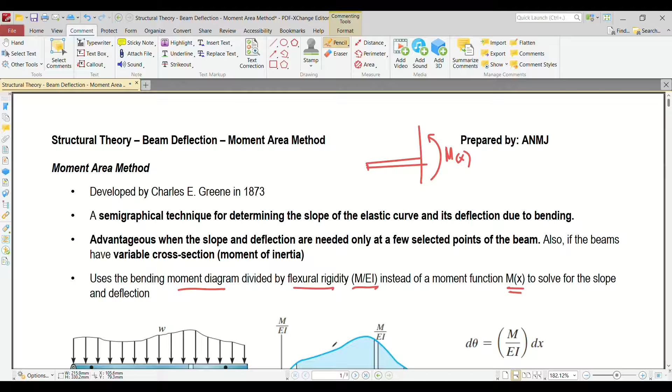So why do we need that? It's all about our derivation of the formula. Later we'll derive it. Okay, let's derive our formula here.

If you'll remember, based on the moment curvature relationship, the value of dx is equivalent to rho d theta. Right? What if I change my mind? Instead of using dx, I want to solve for the value of d theta. What will happen to our equation?

So what happens is d theta becomes equivalent to 1 over rho multiplied by dx. And if you remember, the value of 1 over rho is the same as m over EI, which we derived last time. So therefore, we could say that d theta is equivalent to m over EI times dx.

So now, what if I want to solve for the slope? I need to get rid of the derivative. Isn't the opposite of a derivative integration? So let's integrate both sides.

So what will happen? Let's integrate, and put a limit from a to b on both sides. So what will happen to our equation? Theta with reference to b to a becomes equivalent to the integral of m over EI times dx from a to b.

Okay, so now what is m over EI? Actually, class, m over EI is just the moment diagram divided by the flexural rigidity, just like we said earlier.

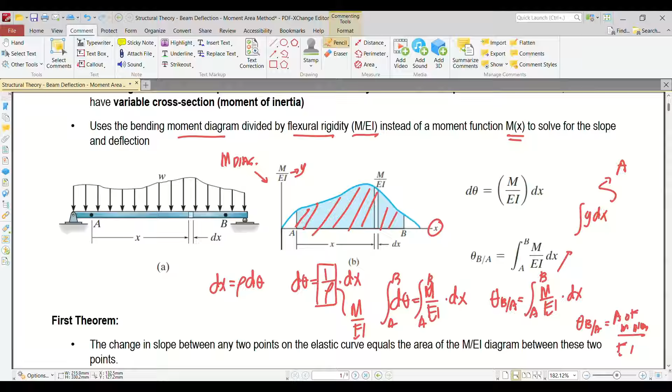So ano nga ba yung theta BA na pinag-uusapan natin? Bakit natin kailangan kuhanin yan? So ito po yan. Basahin na natin yung first theorem. Sabi dito, the change in slope between any 2 points on the elastic curve is equal to the area of the M over EI diagram between these 2 points.

So anong ibig sabihin yan? Let's say for example, this is our elastic curve. Naglagay tayo ng tangent line from point B at naglagay din tayo ng tangent line from point A. So ang subtended angle between two tangent, tawagin natin yung theta BA or theta AB. Either way, okay lang naman magkaiba ng pangalan. Basta may point A, tsaka may point B, or point C, point D, basta dalawa na magkaibang letter. Okay lang yan, nabubuo yan kapag nag-cross ang landas ng dalawang tangent line.

So sabi natin, if you want to get this value, kukuhanin mo lang class yung area nito. Ayan, nakalagay sa formula, theta BA is equivalent to the area of the M over EI diagram from A to B. Now in other books, nakalagay din po na theta BA is equivalent to theta B minus theta A. But ang nakalagay sa akin, o nilagay sa ating module, is this is not always the case.

Why? Take a look at this. Let's say for example maglagay tayong tangent line dito class, una muna siguro dito, sa ating mga points. Kapag naglagay tayo ng horizontal line dyan, ibig sabihin class, itong angle na to is represented by theta A. Kasi meron kang tangent line sa point A, naglagay ka ng horizontal line, subtended angle between the horizontal line and the tangent line, that is your slope. So this is your theta A.

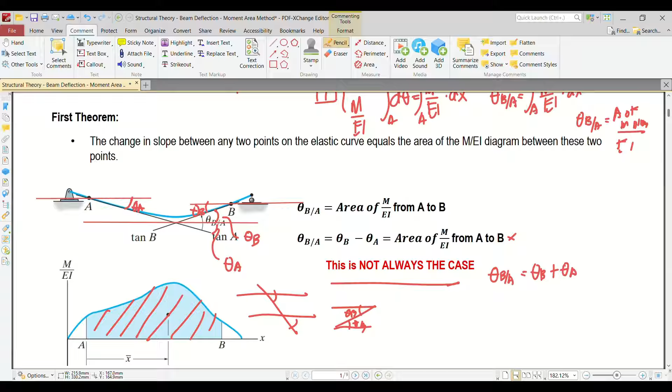So ibig sabihin, hindi ito nag-govern. Hindi pala yan tama. So hindi ibig sabihin class na hindi yan tama, magkaiba lang sila ng senaryo. So take a look at this.

Let's say for example, we have a beam. Drawing natin yung beam, siguro maliit na lang, no? Lagyan natin support, say pin na lang, tapos roller. Okay, subjected to any kind of loading class. So of course the beam will deflect, right?

So lagay natin yung deflection ng beam is kulay blue. So let's say this is point B, tapos somewhere here is point A. So lagay tayong dalawang tangent line. Lagyan natin tangent line sa point B, ito yun. Tapos lagyan din natin tangent line sa point A, ito yun.

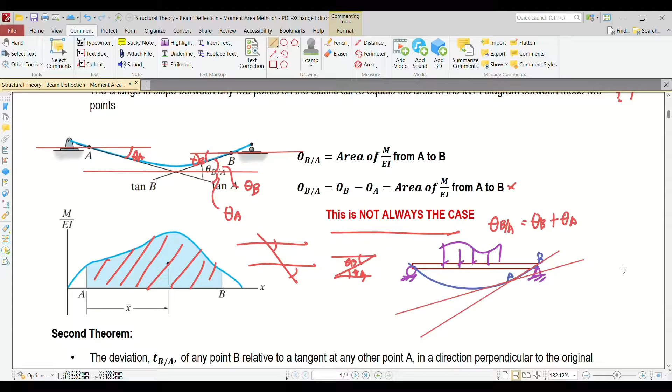Okay, so ngayon mag-drawing na tayo ng different angles. Para makapag-drawing tayo ng theta B, gawa ako ng horizontal line dito, class. Ayan yung horizontal line natin. Ito class, yung from here to here, this is our theta B. Okay, so ngayon punta naman din tayo dito, gawa tayo ng horizontal line sa point A. Para malinaw ha, ito yung tangent line sa B, ito yung tangent line sa A.

So ito class, from here to here, this is your theta A. Sabi din natin, subtended angle between two tangent, ito yung dalawang tangent na pinag-uusapan. Ito rin ay equals to theta BA, subtended angle between tangent eh. Ito yung tangent A, ito yung tangent B. So ibig sabihin ito ay theta BA.

Okay, so ngayon, naniniwala din ba kayo na itong buong to is also equivalent to theta B? So as you can see, parang ganito rin yan, no? Kunyari, meron kang horizontal line dito, dalawang horizontal line.

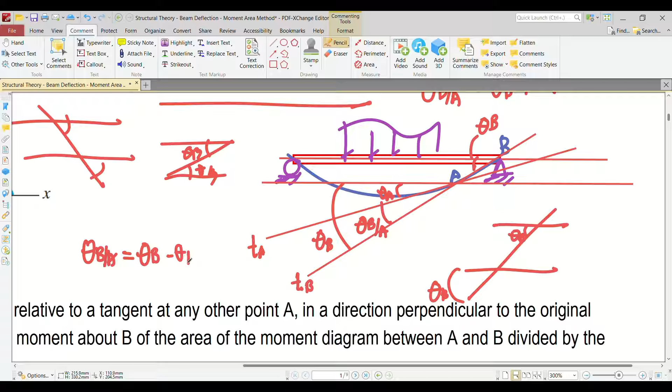Kunyari, ito yung theta B mo. Ayan yun, no? Theta B. So, tama ba na ito rin ay also theta B? Horizontal line, ito yung tangent line sa B. So, therefore, theta B rin to. Okay? So, we could say that theta BA, based on this figure alone, is equivalent to theta B minus theta A. So, ibig sabihin, this statement is true. So, tama rin yan, no?

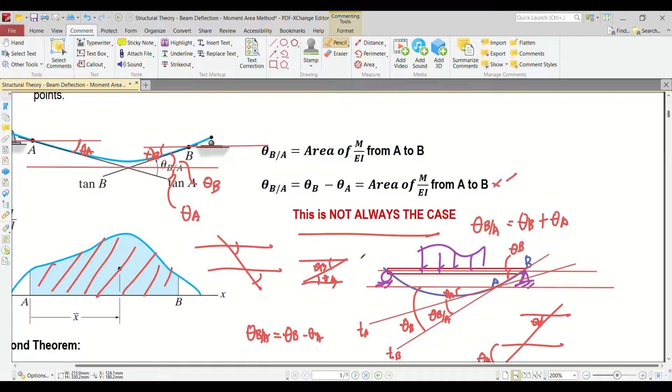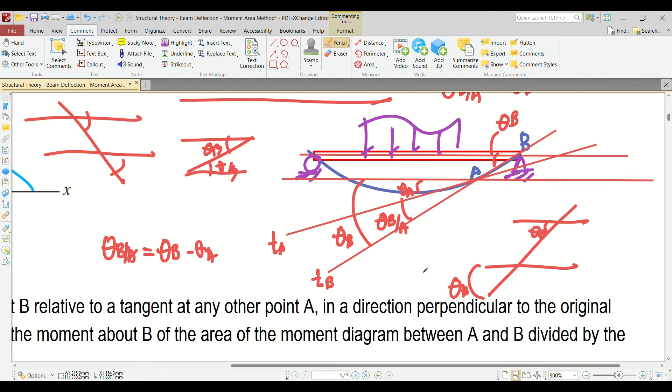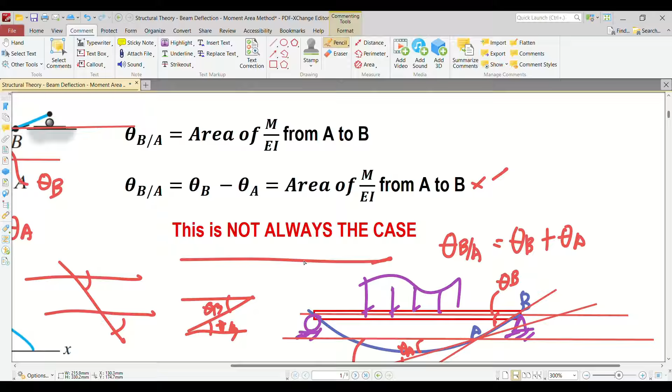So, anong pinarating natin dito? Kailan nagiging tama ang theta B minus theta A? And then, kailan din naman nagiging tama ang theta B plus theta A? So, ganito yan, class. Kapag magkaparehas ng direction ang dalawang tangent line, just like this one, diba? Parehas silang papunta sa left side or parang paangat sa right side. Pababa sa left side, paangat sa right side. Kapag parehas sila ng direction, ang dalawang angle natin ay magsusubtract, or theta B minus theta A. Kapag naman opposite ang direction ng ating dalawang tangent line, just like this one, yung isa na paangat sa left side para pababa sa right side. Yung isa naman, paangat sa right side, pababa sa left side. Magka-opposite yung slope natin, no, ng dalawang tangent line. If that's the case, ang mangyayari sa'yo, mag-a-add yung dalawang angle mo. Take note of that concept kasi that concept is needed in order to solve the value of either theta A or theta B. Naintindihan po?

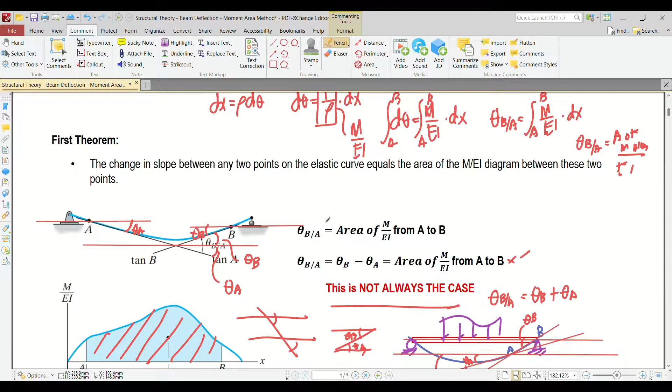So that is our first theorem for moment area method. So ngayon, let's discuss the second theorem of moment area method.

So ito yung statement, basahin ko lang. The deviation TBA of any point B relative to a tangent at any other point A, in a direction perpendicular to the original position of the beam, is equal to the moment about B of the area of the moment diagram between A and B, divided by the flexural rigidity EI. So what does that mean?

So ganito lang po, no? Medyo mahirap intindihin yung second theorem pero ito lang yung pinaparating niya. Kapag gumawa ka daw ng tangent line sa B, tapos sinukat mo yung distance from the elastic curve, no, to the tangent line drawn from another point, in our case that's tan B. Ang tawag dito daw class is tangential deviation of A from the tangent line drawn from B. Okay? So, ganun din naman sa kabila, no? Ito yung tangent line mo sa A, ito yung point B sa ating elastic curve. So, ang tawag dito class, tangential deviation of point B from the tangent line drawn from point A. So, take note na yung pagbasa ng ating tangential deviation is very important. Why? Kasi class, ang sabi dito, to get that value, to get this distance, ang gagawin mo lang is kukuhanin mo yung area ng M over EI diagram from A to B and then you will multiply it by the centroid. Ngayon, saan manggagaling yung centroid ng iyong, or saan yung reference ng centroid ng iyong moment diagram? Take note that kung sino yung unang binanggit, doon manggagaling yung reference mo for the centroid, no?

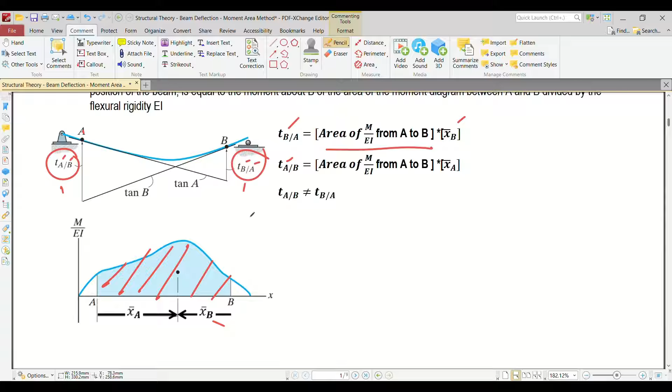So, bakit nga ba natin kailangan kuhanin yung tangential deviation? So, we would need the tangential deviation in order to solve for the value of the deflection, especially, no? Kasi, and the slope, no? Kasi, yan yung magiging basis natin in calculating it using trigonometry. Gagamit po tayo ng trigo dito, no? Okay? So, yan po yung second theorem natin.

Now, let's discuss the sign convention for moment area method. There's no such thing as sign convention for moment area method, class. Kasi kadalasan, ang ginagamit natin is distances, no? Distances na ninegate natin yung mga sign convention.

Kapag ninegate natin yung sign convention, mawawala na tayo sa sign convention. In my class, kung ano yung sign convention sa double integ, yun na lang yung pinapa-adapt ko sa students, para uniform kami pag nagpa-assessment sa kanila. So ganun po yung ginagawa ko.

Pag ganun yung scenario, pag ginamit mo yung sign convention ng double integ, ibig sabihin counterclockwise, positive, clockwise, negative, downward deflection, negative, upward deflection, positive. Akin lang naman yan. If you want to adapt, it's okay, basta you understand.

Kasi naman, we have no choice, we need to draw the elastic curve, para makikita mo talaga kung anong direction ng slope tsaka deflection. Ang ginagawa lang natin dito, kaya tayo nagkakaroon ng sign convention, para pagka nagkaroon tayo ng assessment, uniform yung ating mga sagot.

So although wala siyang sign convention, I have additional notes here. Take note that if the tangential deviation is positive, it means that the location of the elastic curve is at the top of the tangent line drawn from a point. Anong ibig sabihin nun?

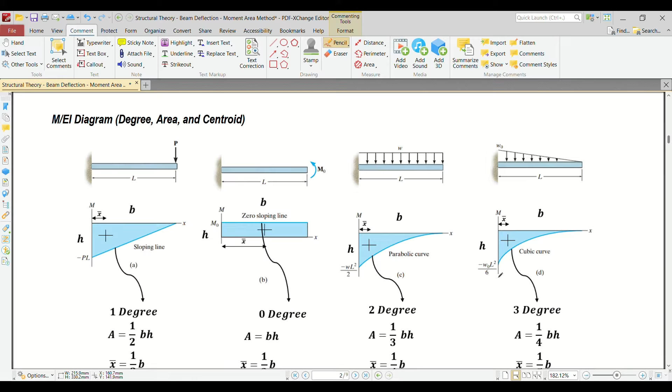Sa moment, second degree. Kapag naman meron kang varying load sa moment, sa shear, since this is already first degree, sa shear, second degree na siya. And then pagdating sa moment, that's third degree o cubic.

Ngayon, since we need areas and centroids, so let's review. Kapag triangular yung nabuo na moment diagram, madali lang naman, 1/2 base times height, and then the centroid will be 1/3 with reference to this axis. Ngayon, kung kabila naman, that's 2/3. And then, pag dito naman, rectangle, base times height, ang centroid is 1/2 ng base. Pag dito naman, 1/3 base times height.

Bakit naging 1/3? Kasi if you'll remember, we have a generic formula for spandrels. Ang generic formula natin is area is equivalent to 1 over n plus 1 times b, times h. Ngayon, ano ba yung n dito?

N is the degree of your curve. So if your degree is second, therefore yung area mo is 1/3 base times height, tulad ng nakasulat dito. Yung centroid naman, may generic din formula, so that is 1 over n plus 2 times b. So in our case, since we have second degree, yung centroid mo is 1/4 ng b.

Considering this is the reference point. Kapag kabila naman, of course, that's 3 over 4. Ngayon, kapag third degree, gagamitin mo lang din yung formula na to, so that's 1/4 base times height. Kapag naman centroid, that's base ng 1/5 ng base kasi third degree na nga tayo. And then for kabila naman yung gagamitin mo, that's 4/5 times b.

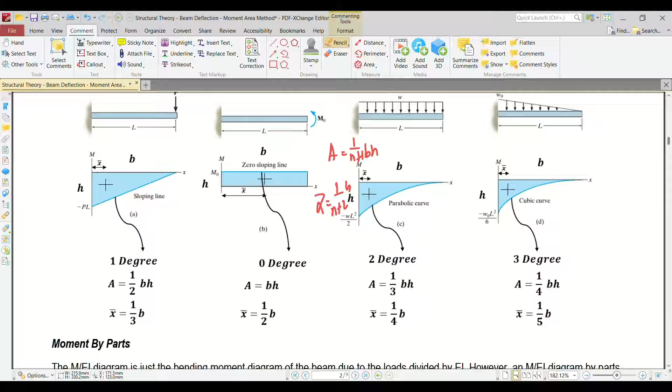Ngayon, medyo mahirapan ka kasi kung dadaan ka sa shear diagram tapos pupunta ka pa sa moment diagram. So meron akong sinasuggest na pwedeng gamitin, that's what we call moment diagram by parts. Yung moment diagram by parts kasi pwedeng gamitin para maka-shortcut ka, para hindi ka na dumaan sa shear diagram. So pwede rin gamitin po ito.

Parehas lang masosolve natin kapag nag-gawa tayo ng shear and moment diagram. Okay? So paano nga ba yung moment diagram by parts?

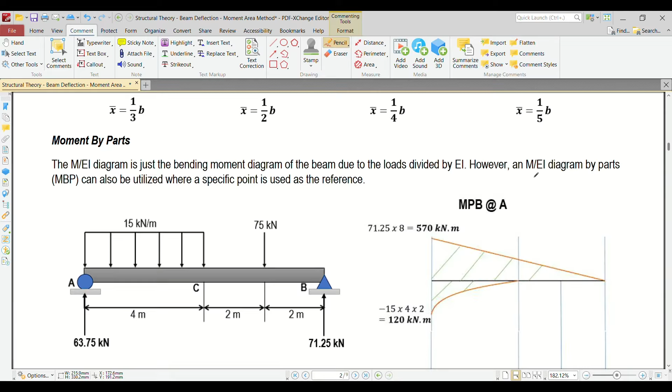Take note class, sa moment diagram by parts, ang unang gagawin mo is you need to select a reference point. Take note, in selecting a reference point, you have to be strategic. What do I mean by strategic? Dapat yung isa-select mong point of reference, may makakancel kang forces. Bakit mo siya makakancel? Kasi gagawin mo siyang fixed. Lahat ng forces iikot dun sa reference point mo.

Let's say for example, we have this kind of beam, at nakalagay na dyan yung mga reaction, class. So what if I take reference point at point A? Ibig sabihin, yung point A natin, gagawin nating fix. Ano yung mga na-cancel kong forces pag nag-reference point ako sa point A? Of course, yung reaction sa A, hindi na yan iikot sa point A kasi wala siyang perpendicular distance. And then ito, ikot yan. Yung reaction mo sa B, ikot din yan. And then the uniform load, iikot din yan. So lagi nyo lang tatandaan, gagawin mong fix yung reference point mo.

All of the upward forces will also be upward with reference to your reference point, and that should be positive—lahat ng pataas should be positive. Kapag naman pababa yung forces, pababa din sa reference point mo, and negative din sila sa iyong moment diagram by parts. So as you can see here, ito yung moment diagram by parts with reference to point A.

So ano yung maiikot? Since this is concentrated loading, first degree siya sa aking moment diagram. So that's 71.25 pataas times 8, so that's 570 kilonewton meter. Pataas siya, so pataas din siya sa reference point ko, so that is positive.

Ngayon, yung 15 naman, so as you can see, yung 15 kilonewton per meter is uniformly distributed loading. Ibig sabihin, itong curve na to, class, is second degree. Kung second degree siya, napababa, pababa din siya sa aking reference point. How do you get the value of the moment of this uniform load? Magmo-moment ka lang from point A, that's negative 15 times 4 times 2, ang sagot mo, negative 120 kilonewton meter. Bakit negative? Kasi the forces is downward with reference to point A.

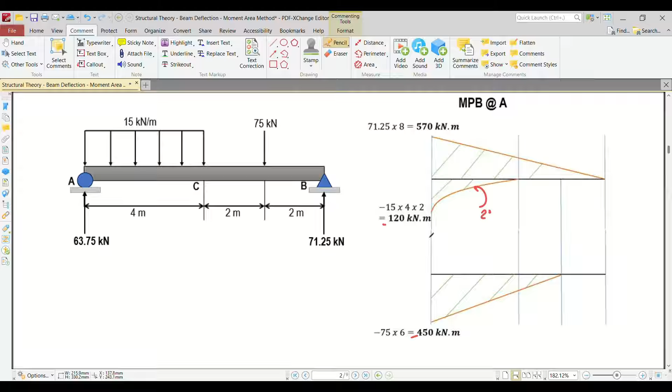So let's say we want to take reference at point B. Ibig sabihin, makakancel ko yung reaction ko sa B. So dito ka na mag-fix. Kapag dyan ka nag-fix, class, all of the forces will move or rotate at that point.

So ngayon, ano yung magro-rotate? Number 1 is the 63.75 courtesy of the reaction sa point A, multiplied by the perpendicular distance which is equivalent to 8. Ngayon, ang value niyan, 510 kilonewton meter. Aside from that, we also have the concentrated loading, downward din sa aking reference point, that's 75 times 2, first degree kasi concentrated loading.

Okay, and then you also have 15 kilonewton per meter, uniformly distributed load siya. So therefore, second degree from point A to point C lang, class. Bakit ganyan? Kasi kung matatandaan ninyo, kapag naputol yung loading mo pag nag-drawing ka ng shear diagram, ini-straight mo lang. So kapag ini-straight mo lang, pagdating sa moment diagram, naka first degree yan kasi 0 degree yung shear. Ganon din dito—since yung uniform load natin is from point A to point C lang, ibig sabihin yung second degree lang ay from point A also to point C lang.

So ngayon, paano makuha yung height na to? Mag-moment ka dito sa point na to, so that's 15 times 4 times 2, negative, kasi pababa ka sa reference point. So ito yun, negative 120 kilonewton meter. Now, hindi ka pa naman nakarating sa reference point mo kasi dito ka lang, yan lang yung second degree. Kailangan mo paratingin yan dito.

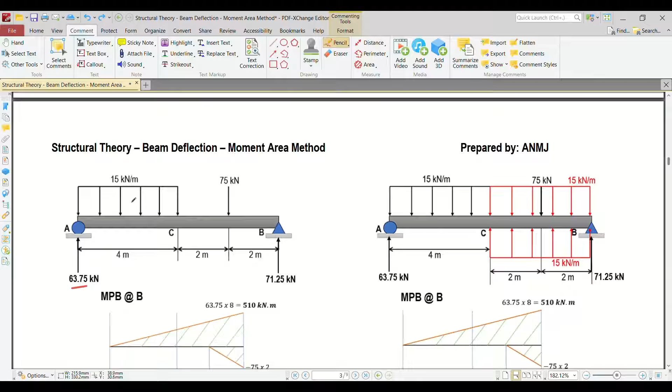Now, how do you get this height? You just moment this 15 again with reference to point B. So that's negative 15 times 4 times 4 plus 2. How did it become 4 plus 2? This 4 is your class, and then plus 2 with reference to the centroid of the uniformly distributed loading. Understood? That's how we do moment diagram by parts at letter B.

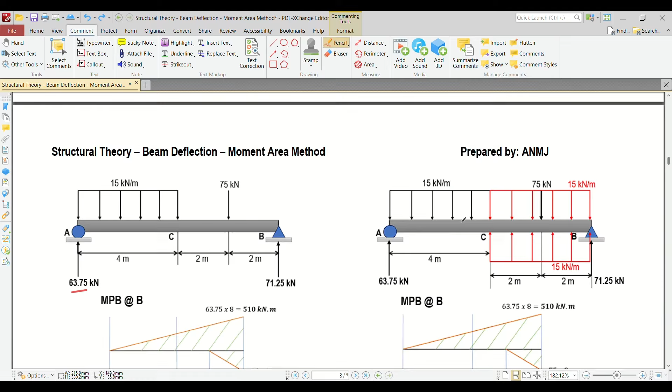So that second degree upward is 15 times 4 times 2, which is our centroid. So that's 120 kilonewton meter. Okay? So since this is now complete, the function won't be cut anymore.

So that's 15, negative, because it's going down relative to our reference point. So negative 15 times 8 times 4. So that is negative 480 kilonewton meter. Okay? So that's with reference point at point B.

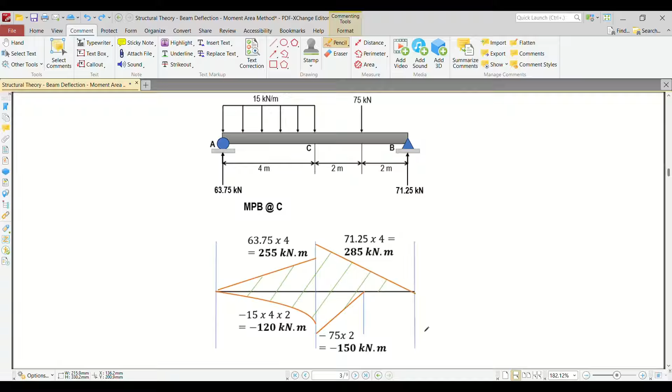Number 1 is the 63.75, upward here too. And then 71.25, also upward relative to your reference point. Then this one goes down, second degree, negative 120. This one goes down, 75, to negative 150. So this will be your moment diagram by parts if you took the reference point at point C. Everything rotates. Okay?

So again, it's up to you in selecting your reference points or in using moment diagram by parts. Whatever makes it easier for you, that's what you should follow. This is just an alternative if you don't want to go through shear and want to jump straight to moment. This is very useful, especially if you're solving for moment area method.

Okay, so now let's try to solve problem number 1 with reference to moment area method. As you can see, our figure and our problem is also problem number 1 for our other topic in beam deflection. Let's try to answer it using moment area method, okay?

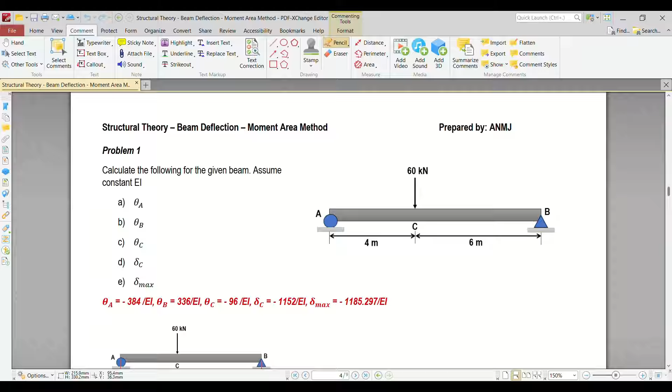So for problem number 1, calculate the following for the given beam, assume EI is constant. Letter A, theta A; letter B, theta B; letter C, theta C; letter D, deflection at C; and letter E, the maximum deflection, okay? So how do we solve this problem?

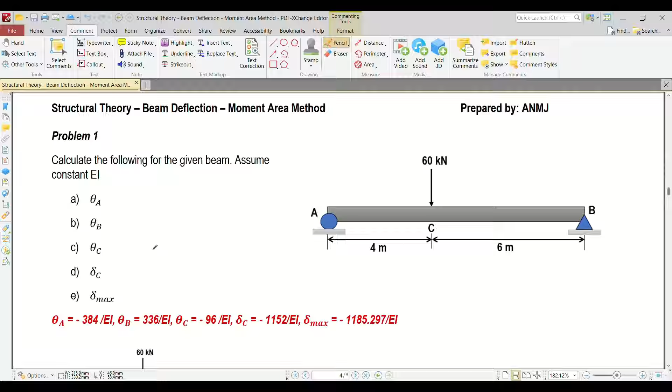First thing you need to do, class, is draw the moment diagram by parts. Remember, when you use moment area method, you need a moment diagram. So start immediately on the moment diagram by parts. If you remember, the reaction here is easy, we already computed that. That is equivalent to 36 kilonewton, and for this one, this is equivalent to 24 kilonewton.

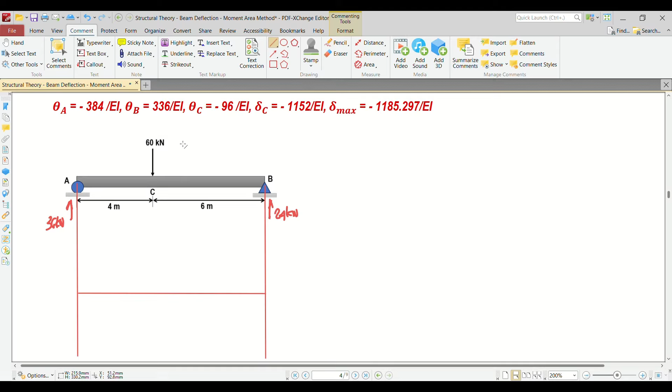Now, the popular choice here is to take the reference point at point A. You can also do point B, or point C, it's up to you. But for me, my reference point is point A. So the 24 and the 60 will rotate from the reference point.

So now, let's start with the reaction first. This is first degree since it's a concentrated loading. So this is 24 times the distance, that is 10, then divide by EI. This is positive because it's positive relative to the reference point, pointing upward. So this is 240 over EI, okay?

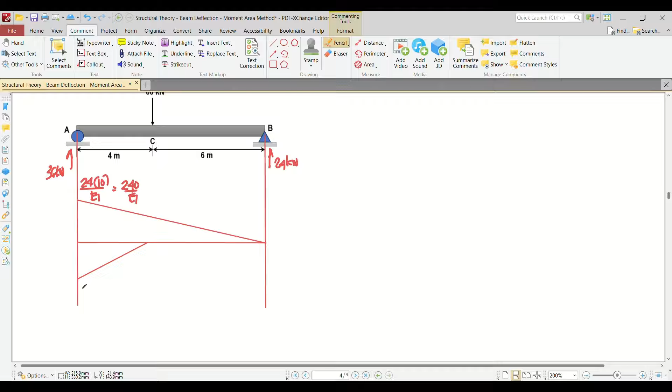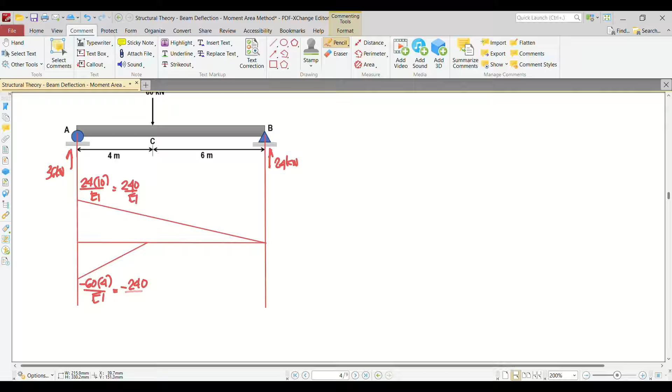And then you also have the 60 kilonewtons at point C. Our drawing is also first degree since it's a concentrated load. So the value here is negative 60 because it's downward, then times 4, divide by EI. So this is also negative 240 over EI.

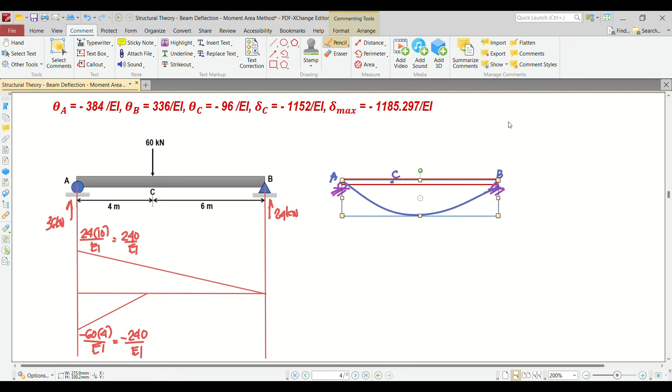Pag wala ka ma-solve, syempre yung sa first point ang hinahanap, theta A. Paano mo kaya makukuha yung theta A? Pag wala ka ma-solve, ang magandang gawin dyan, maglagay ka ng mga tangent line. Since point A, theta A ang hinahanap, pwede maglagay tayong tangent line sa point A. So lagay akong tangent line sa point A. So ito yon.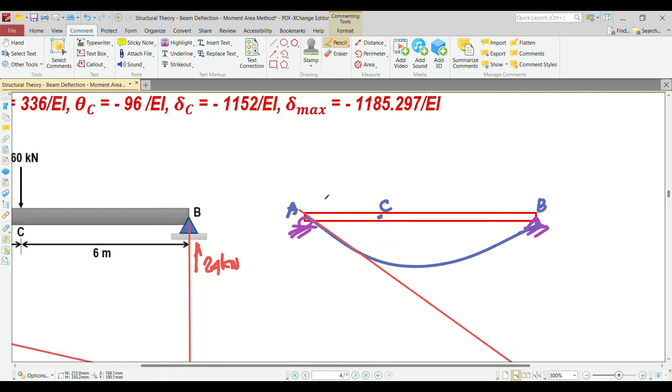Ngayon, ano bang hinahanap sa point A? So ito, lagay tayong horizontal. Ito yung horizontal line, ito yung tangent line. Ang tawag dito, class, is theta A. Paguhin ko lang yung pen. So this is your theta A.

So ngayon, paano kaya natin sosolvein yung ating theta A? Take note, meron tayong dito, distance nito. Ano nga ba yung distance nito? From here to here, ang tawag dito, class, since this is the tangent line from A, ibig sabihin, ang tawag dito ay tangential deviation of B from the tangent line drawn from A. Tangential deviation of B from the tangent line drawn from A.

Ngayon, di ba, if you remember, theta is a slope. Tama? A slope has a formula. Ano nga bang formula ng slope? Remember, yung slope is equivalent to rise over run. Tama ba? Rise over run.

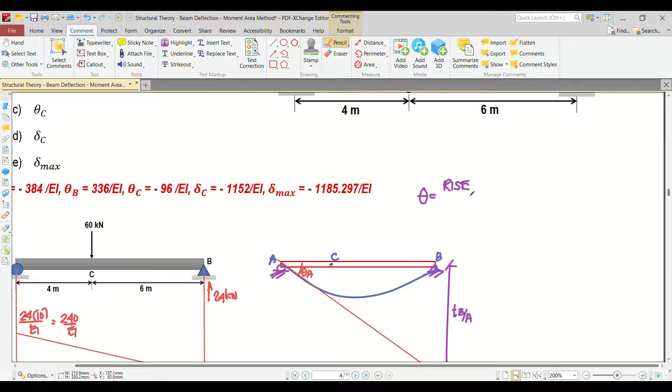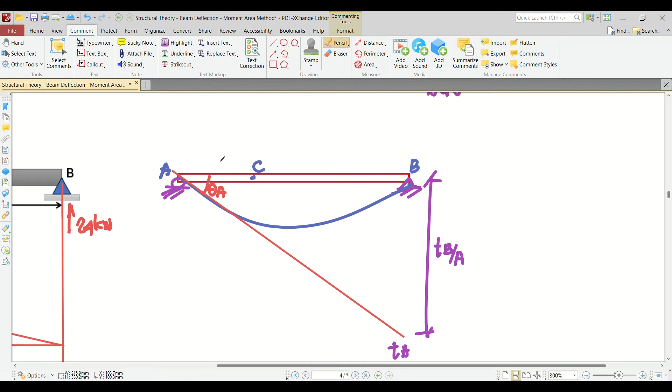Ngayon, ano yung rise over run natin dito? Yung rise natin is with reference to TBA, and yung run natin is with reference to the length of the beam. So ilan ba yung length ng beam? If you remember, this is 4 meters, this is 6 meters. So ibig sabihin pala, if I want to get the value of theta A, i-divide ko lang yung TBA sa 10. Hindi gawin na natin yun, no?

So ngayon, sulat na lang natin dito. For letter A, we want to get the value of theta A, which is equivalent to TBA over 10, or rise over run.

So ngayon, ano nga ba formula ng TBA? Yung formula ng TBA is 1 over EI, nilabas ko lang yung M over EI, times area of moment diagram from A to B multiplied by X bar. Sino yung unang binanggit? B. X bar B. Okay, so dito na lang sa natin simulan.

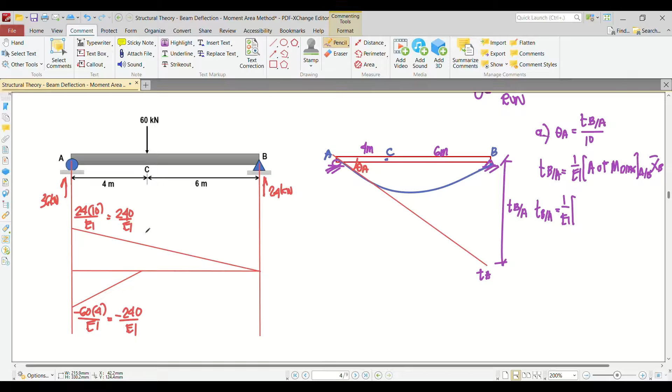So TBA is equivalent to 1 over EI. Ano bang area natin? Pupunta tayo dun sa moment diagram by parts. Unahin na natin to, dalawang triangle lang naman yan. Yung unang triangle natin is 1/2, 240 times the length, 10. Remember, nilabas na natin si EI. So therefore, this is 1/2, 240, and then yung length is 10.

Centroid, unang binanggit si B. Yung centroid mo right here, kasi ito yung B mo, no class? Ito yung A, ito yung C. So therefore, that is 2/3, somewhere here. That's 2/3 ng 10. Lagay natin dito, 2/3 of...

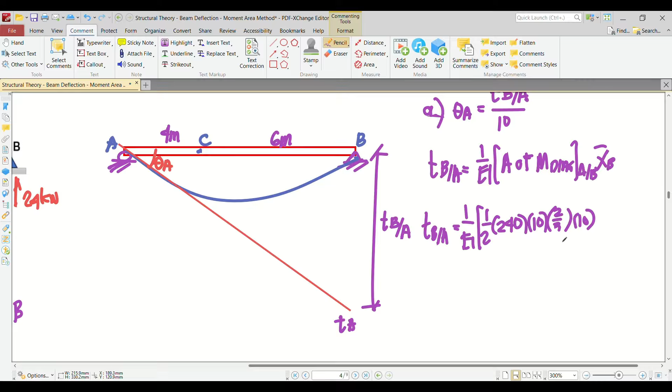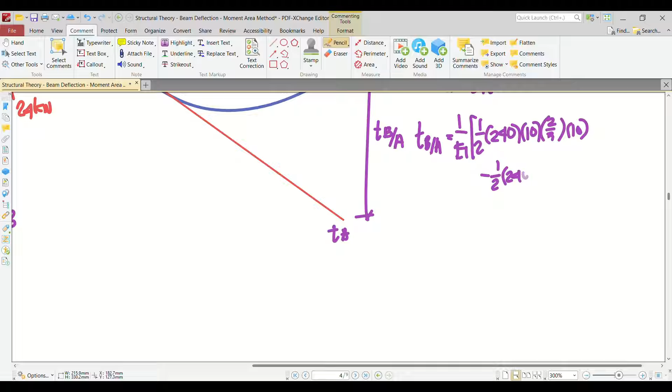10. And then, minus class, kasi nasa baba. So minus 1/2, 240 times 4. Minus 1/2, 240 times 4 times the centroid. Remember, with reference to point B. So that's 2/3 ng 4 kasi 4 meters ito, no? 2/3 ng 4 plus 6. Okay, ano natin dito? 2/3 ng 4 plus 6.

Okay, so ngayon, computein na natin si TBA. Ilan kaya yan? So that's 1/2, 240, 10, 2/3 ng 10. Minus 1/2, 240 times 4, 2/3, 4 plus 6. 6 po ito, ha.

Okay, so ang lumalabas sa akin, 3840 over EI. So ngayon, if you want to get the value of theta A, that is just equivalent to 3840 divided by EI and then divided by 10. So ngayon, ang sagot natin for theta A is equivalent to 384 over EI. Okay, so that is our answer.

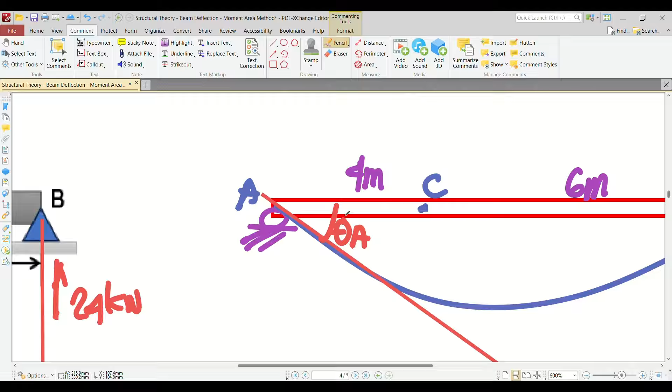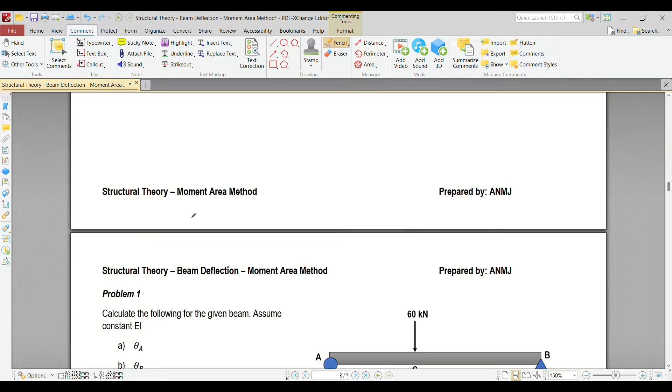Ngayon, anong direction? So tignan mo yung figure. Horizontal line up to the tangent line, that is in clockwise direction. So ibig sabihin ito ay clockwise. Okay, so that is our answer for theta A. So tignan natin kung tama naman. 384 over EI. Okay, so let's now try to solve theta B.

So ganun lang din, just like what we did on our previous example. Gawa kang tangent line sa point B. So ito yon. And then, wait lang.

So ang tawag dito class, from here to here, this is tangential deviation of A, since this is tangent sa B. Tangential deviation of A from the tangent line drawn from B. So ang hinahanap natin class is theta B, which is horizontal line to the tangent line. This is theta B.

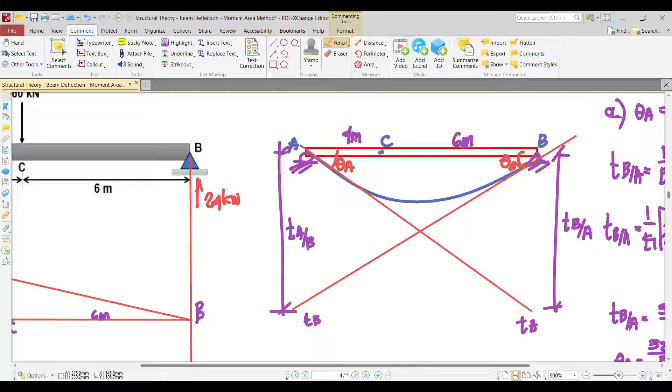So for letter B, rise over run. Theta B is equivalent to TAB over 10. So let's now try to solve TAB. TAB is equivalent to 1 over EI. If you remember yung formula natin, it's 1 over EI, area ng M diagram or moment diagram times X bar.

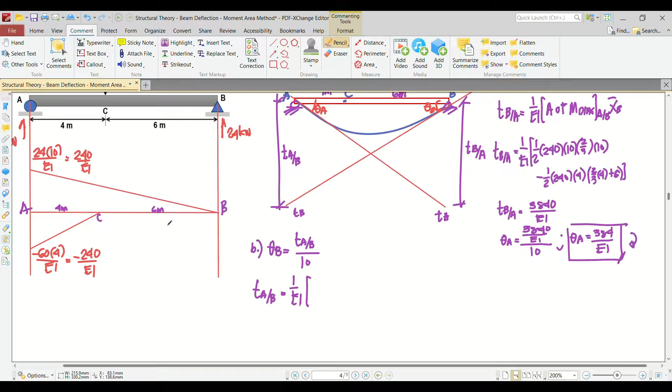Okay? Ganun pa din area nito. So that's 1/2 times 240 times the length is 10. Yung centroid natin, unang binanggit si A, so therefore 1/3 ng 10. So 1/3 ng 10 and then minus 1/2, 240. Tapos yung length natin dyan is 4.

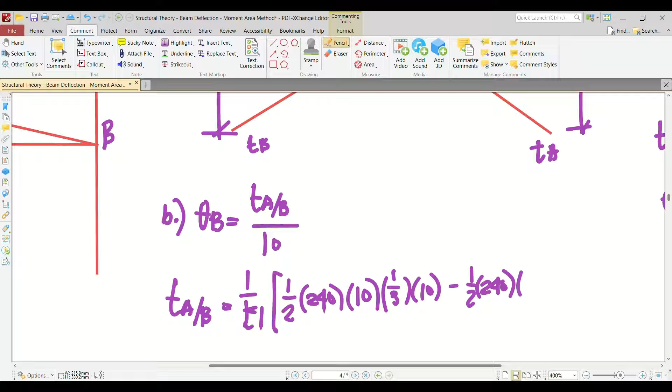Burahin ko lang. And then yung centroid, that would be 1/3 ng 4. Okay?

So therefore, what's the value of TAB? So 1/2, 240, 10, 1/3 ng 10 minus 1/2, 240, 4, 1/3 ng 4. So that's 3360

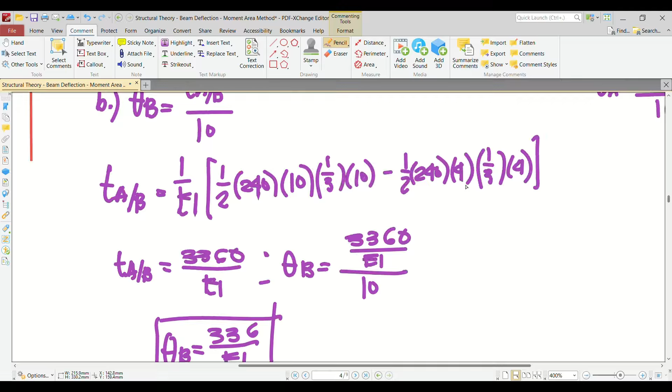over EI. Ngayon, if you want to get the value of theta B, that is just equivalent to 3360 divided by EI and then divided by 10. So therefore, yung theta B natin class is 336 over EI. Okay? So that is our answer. Anong direction? As you can see, horizontal line to the tangent line, counterclockwise. So this is counterclockwise. Okay? So that's how we solve theta B.

Tama naman, no? So ngayon, paano kaya yung theta C? So yung theta C ganito. Since this is our elastic curve, the representation of point C on the elastic curve is right here. So since hindi mo kayang ma-solve, no? Wala kang makita kung paano mo siya ma-solve, edi maglagay ka ng tangent line sa point C. So lagay tayong tangent line sa point C. So ito yon.

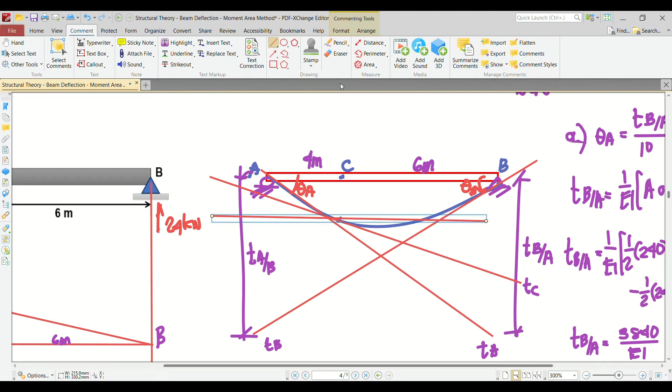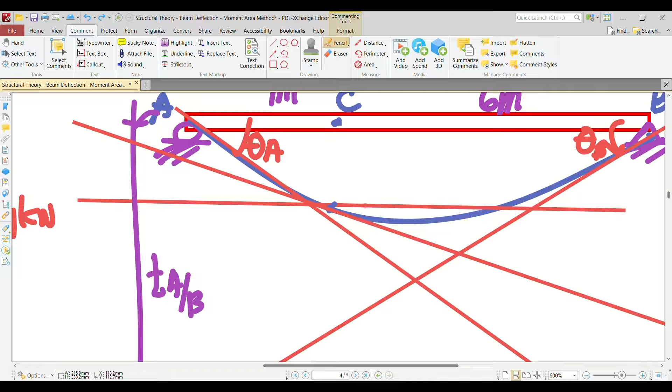Kunyari, yan yung tangent line mo sa point C, T, C. Ngayon, para makita mo yung angle, kailangan mo maglagay ng horizontal line sa point C din. Ayan. Okay? So ngayon, gawa tayong angle. So ito class, horizontal line lang. Horizontal line to the tangent line drawn from a point, that is your theta C. Or lagyan na lang natin ng arrow. Tandaan nyo, ito ay theta C. Okay? Paano kaya natin yung masosolve yung theta C na yan?

O, makinig. Tingnan dito. So subtended angle between two tangents. Ito yung tangent line mo sa C, tangent line mo sa B. So therefore, itong angle na to class is, ano kaya? Theta CB or theta BC, parehas lang. Okay? So ngayon, kung theta CB naman, so dina-drawing akong horizontal line dito class, no?

Pag nag-drawing akong horizontal line dyan, kung ito ay theta C, as you can see, ayan, no, theta C yan, no? So ibig sabihin pala, since ito ay tangent line sa C rin, ito ay horizontal line din. Ito rin pala is theta C. Itong angle na to, ito rin pala ay theta C. Tama ba? So ngayon, if you can see in our figure, since parallel, Z ito, no?

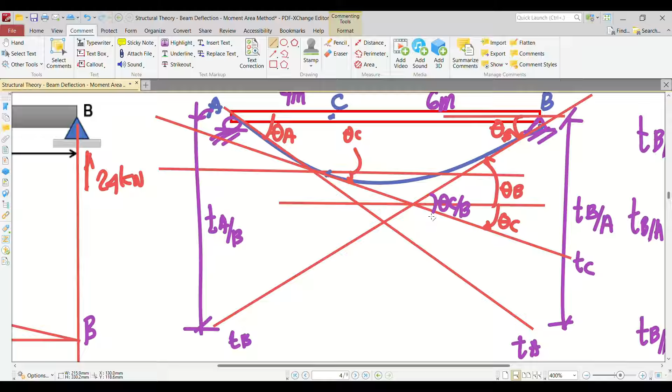Ito ay theta B. Ito ay tangent line sa B. So ito rin pala ay, simula dito hanggang dito, theta B. Tama ba? Letter Z eh. Ito. Ganyan kong horizontal line dito. Ayan o, letter Z. Ito. So if this is theta B, this is also theta B.

Okay? So we could say that if you want to get the value of theta C, that is theta CB minus theta B. Tama ba? Okay? So parang ganito. So letter B, lagay na lang natin dito, letter C. So if you want to get the value of theta C, that is theta CB minus theta B. Okay? So ngayon, kumpitin na natin si theta CB.

Paano nga ba makumpit si theta CB? If you'll remember, that's 1 over EI times area of moment diagram from C to B. Walang centroid, no? Pang-tangential deviation lang yon. So ibig sabihin pala, theta CB is equivalent to 1 over EI. Pero take note class, hindi pa natin makukompute yung area niyan, kasi kailangan natin na ito, itong height na to. Kasi ang area na kino-consider lang natin is in between C and B. And we don't have this height, no? Tawagin natin Y. How do we get the value of Y?

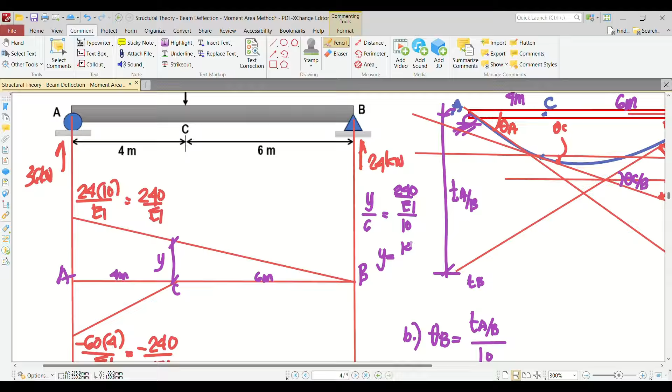We could use ratio and proportion, no? So paano kaya yon? So pwede nating sabihin na Y over 6 is equivalent to 240 over EI divided by 10. So ang lalabas dyan, Y is equivalent to 144 over EI. So therefore, ang area nito is 1/2. Ang height mo, 144. Ang length mo is 6. So therefore, what's the value here?

1/2 times 144 times 6, so that's 432. This is 432 over EI. So if you want to get the value of theta C, this is just equivalent to 432 over EI minus theta B, which is 336 over EI. So therefore, theta C is 96 over EI. So that's our answer.

So now, what direction is that? If you take a look at our elastic curve, as you can see, the direction of theta C is clockwise. So let's put that there, clockwise. Okay, so that's how we answer letter C. Let's check, that's correct.

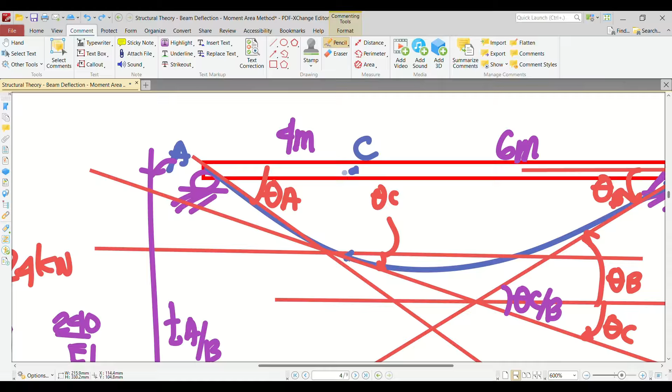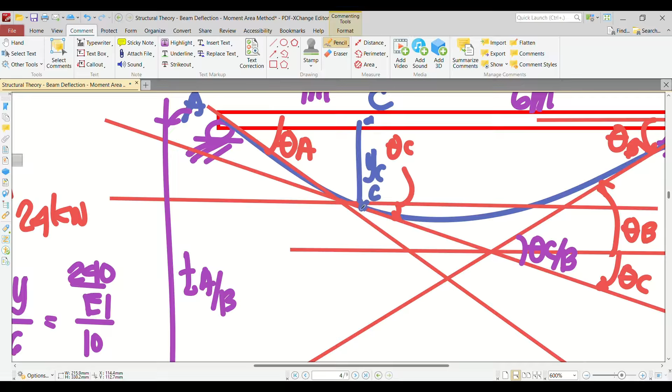So how about the deflection at point C? How do we solve the deflection at point C? So here it is, class. From here to here, that's our YC. How do we solve the value of YC? It's easy, class. Remember, starting from here, wait. Remember that starting from point C, this is your representation of point C, right? From there up to here, what's it called?

Remember, what we considered is the tangent line at point B. So that means, from the elastic curve to the tangent line at point B, that's called the tangential deviation of C from the tangent line drawn from B. Okay, so how do you get YC?

As you can see, it's like a triangle. This is the height, this is the hypotenuse, this is the length. So we can use the slope at B. Rise over run again. The rise will serve as YC plus TCB, and the run is 6. Okay, so we can use that.

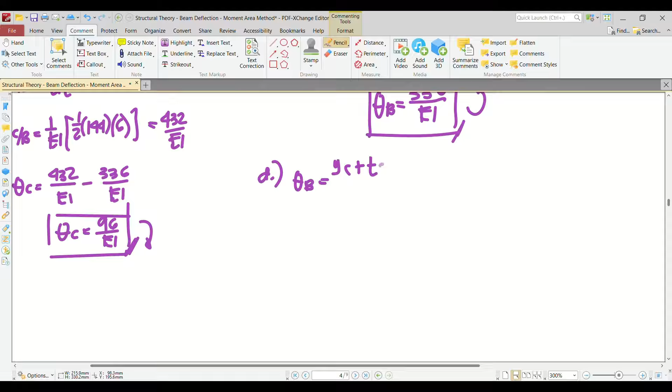So let's go to letter D. For letter D, class, if you want to get the value of YC, that's theta B equals rise, which is YC or deflection at C plus TCB, over 6. So that's it, class. YC plus TCB divided by 6, rise over run. Okay, so how do we solve that?

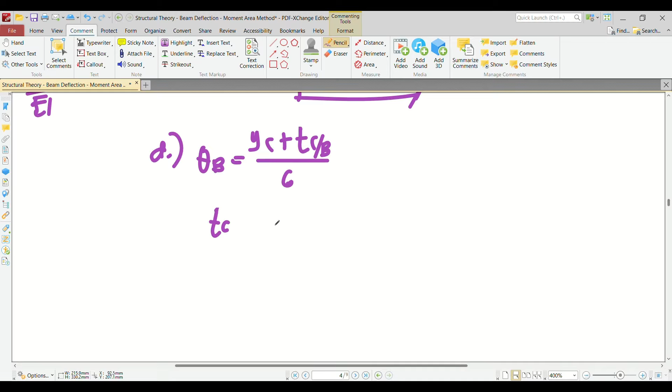Let's compute TCB first, since we already have theta B. So TCB is equivalent to 1 over EI times 1/2 times the length, times the height.

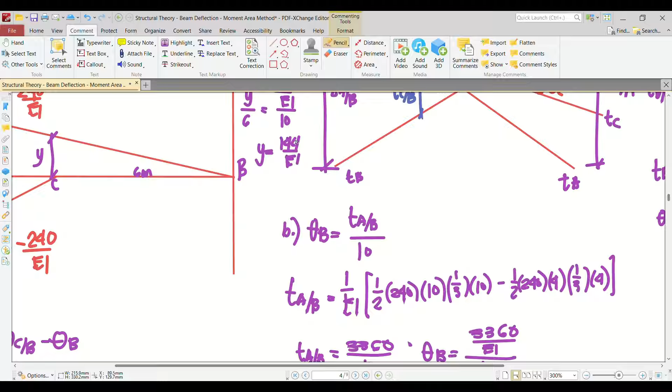Remember the height we already solved, that's Y, which is equivalent to 144 over EI. So 144 times the length, 6, times the centroid. Since C is mentioned first, class, the centroid location is 1/3 of 6. So 1/3 of 6, that works.

So TCB, how much is that? 1/2, 144, 6, 1/3 of 6. So this is 864 over EI.

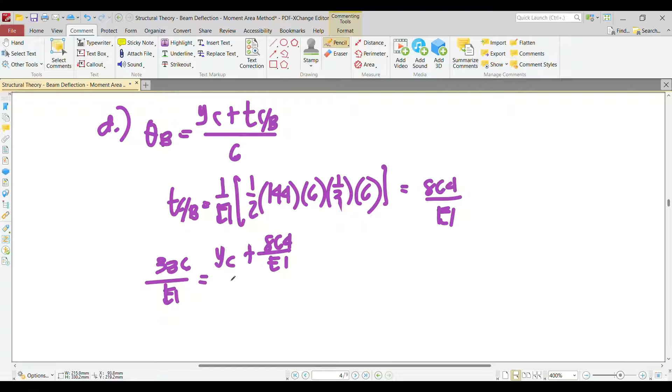Okay, now let's plug it in. So this 336 over EI is equivalent to YC plus 864 over EI, divided by 6. So what's the value of YC? 336 equals YC plus 864 over 6. So our YC is 1152 divided by EI.

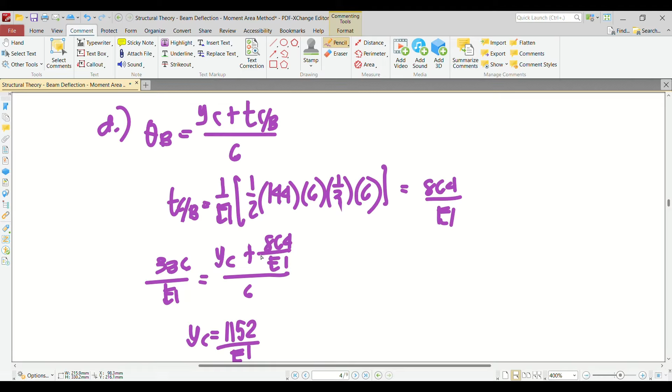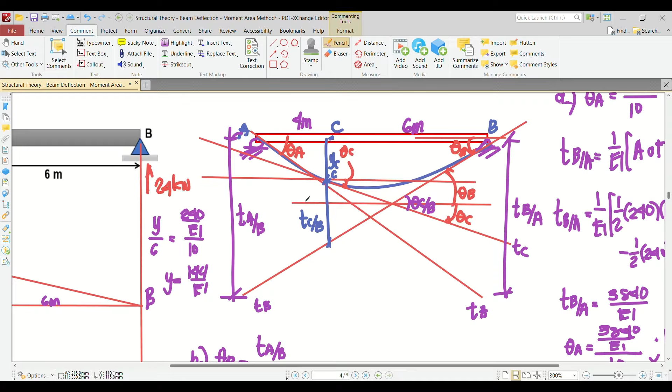So how about Ymax? How do we solve for Ymax for letter E? Now, based on our double integration lecture, we can get Ymax when the slope is 0. How does the slope become 0? When the tangent line and the horizontal line coincide, meaning they're both horizontal.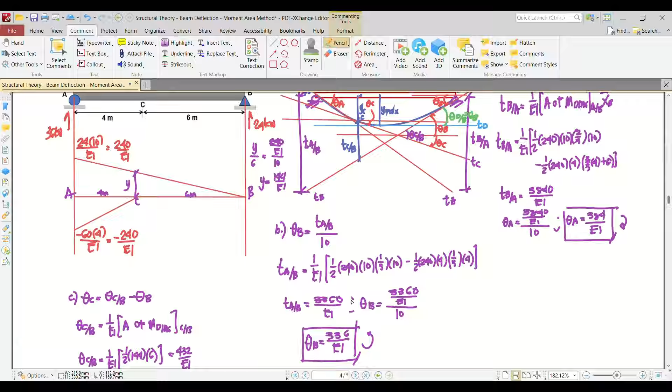Itong part na to, kung letter E yan, ibig sabihin yung theta dB mo is also equivalent to theta B. So we could use that relationship in order to get the value of x. Okay, so ngayon, paano natin makukuha yung value ng x, yung location ng ating maximum deflection?

So sabihin natin, nandito yung point D natin, yung ina-assume ko. The distance from here to here, this is x. Tapos we want to get the value of y, kasi kailangan natin yan, no? Paano kaya natin kukuhanin si value ng x, si value ng y in terms of x?

So pwedeng ratio and proportion, no? So paano yan? So y over x is equivalent to 240 divided by EI, tapos divide mo ng 10. So ibig sabihin pala, yung y ko, we could say that that is equivalent to 24x divided by EI. So we can now use this relationship in order to get the value of x, since may theta B naman tayo.

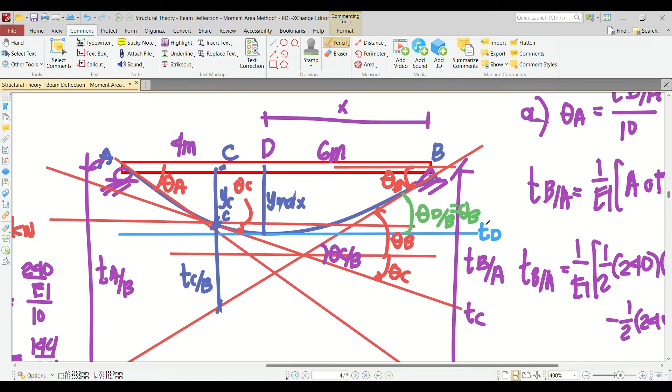Theta dB kasi is just the area of this moment diagram, itong may shaded portion na to. Okay, madali lang, so paano yan? Okay, so start tayo dito, letter E. That is equivalent to theta dB, is equivalent to theta B. Okay, so ito is just 1 over EI times 1/2, area lang nito.

So yung y1 para ma-designate natin na iba. So 1/2 times y1, y1 is 24x. So ilagay natin dito, so 1/2, 24x. Nilabas ko na kasi si EI. Times na lang is x if you'll remember, no? And then equate mo yan sa 336 over EI. So ngayon, makakuha ka ng value ng x.

So x is equivalent to 5.2915 meters. Now hindi mo agad-agad gagamitin yan.

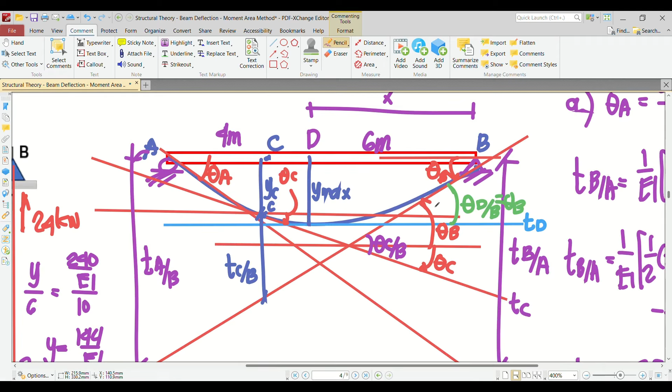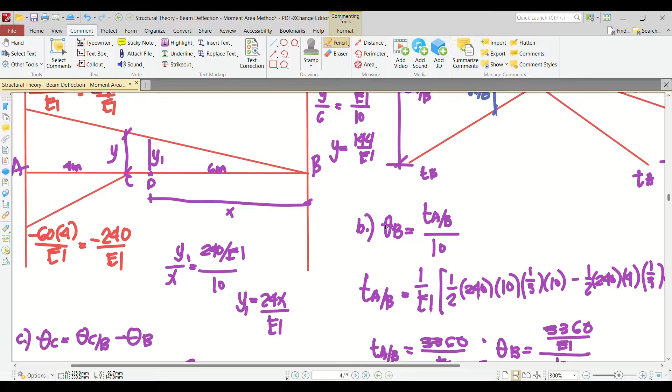You have to check if that is correct or not. Paano natin i-check? Remember, nung nag-assume tayo, sinabi natin na yung x value is less than 6 meters. Bakit? Nung nag-ratio and proportion tayo, sinabi rin natin na yung y max, yung location niya, hindi lalagpas ng 6 meters. Kapag kasi lumagpas na, you need to consider this area, no? Kapag magko-compute ka ng value ng x mo. Ang kinonsider lang natin itong portion na to eh, so inassume natin na hindi siya lalagpas ng 6.

Ngayon, ano ba yung value natin? O hindi naman lumagpas ng 6, so therefore this is correct, no? So again, nag-assume tayo na yung maximum deflection is in between B and C. If that's the case, yung point D natin is ito.

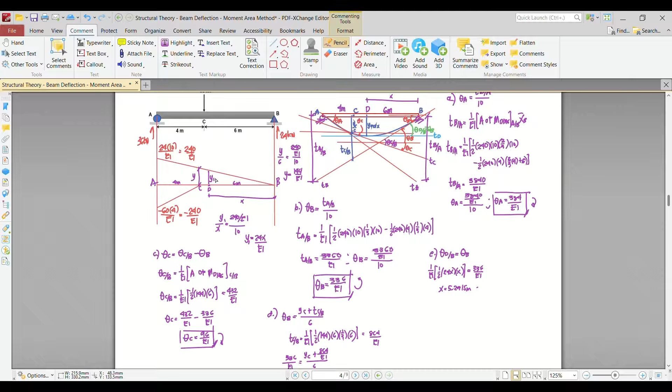So nagkaroon tayo ng x class. Yung y1 natin, in terms natin sa x. And considering this figure, inassume natin na hindi siya lalagpas dito, kasi kung lalagpas yan dyan, magkakandaletse-letse yung calculation natin. So ngayon, dahil hindi lumagpas, rekta na tayo, pinlagin natin dito. Nakuha natin yung x, less than 6 naman, so that is correct, no?

So ngayon sir, paano natin makukuha yung y max dyan? Nakuha mo lang yung value ng x. Ito kasi yung y max, no? Diba ito ay y max. From here to here, yan yung y max. Ngayon, diba y max din ito?

Baguhin ko lang yung kulay, class, no? Diba from here to here, this is also your y max. And then, that is also your tangential deviation of B from the tangent line drawn from D. Ito yung tangent line sa D mo eh, ito yung point B mo.

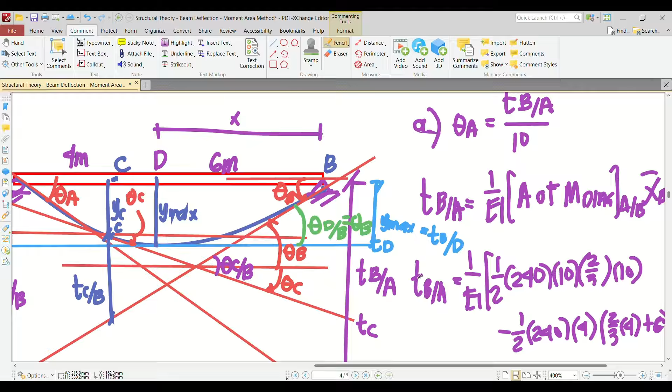So ibig sabihin, if you want to compute for the value of y max, kukumputin ko lang din pala yung tangential deviation of B from the tangent line drawn from D. Okay, so banatan na natin. So since meron na tayong x, so paano yan?

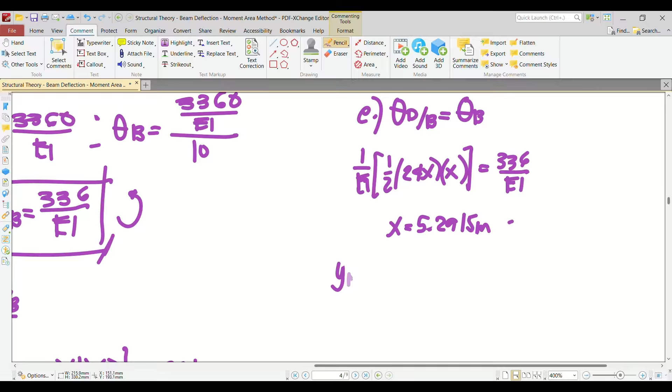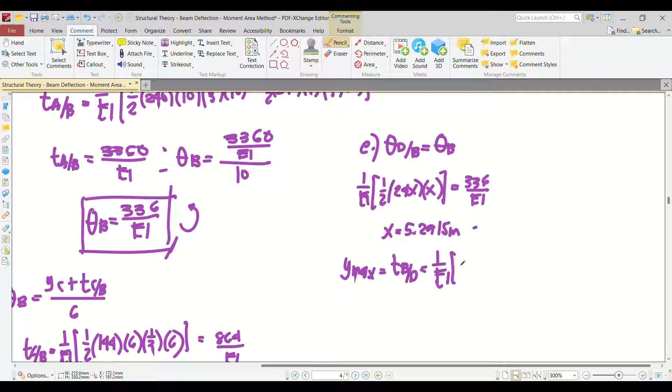So y max is equivalent to TBD is equivalent to 1 over EI. Area in between B and D, so that's 1/2. Ang height mo ay y1, which is 24x. Meron na tayong value ng x, so 24, 5.2915.

And then yung length, yung length is 5.2915. And then yung centroid, unang binanggit si B class, so therefore that is 2/3 ng 5.2915. So 2/3, 5.2915. Okay, so ngayon, yung Ymax natin class is equivalent to 1/2, 24, 5.2915, 5.2915, 2 over 3, 5.2915.

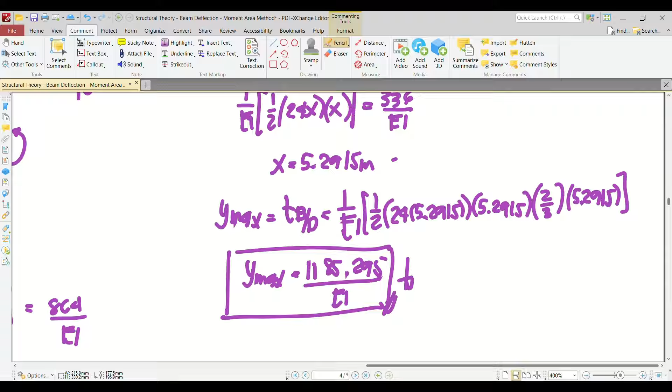1185.295 over EI. That is in downward direction. So therefore, that is our answer. Okay, so let's see, 1185.297, so nag-round off lang po tayo. Okay, but basically that's the same.

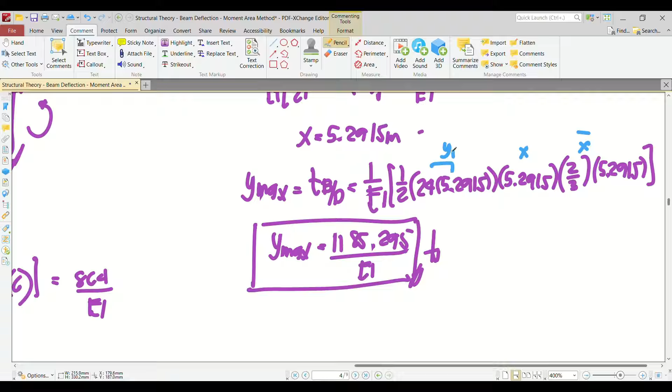Kung nalilito kayo dito, so pwede ko naman lagyan ng mga variable. So ito po yung naging y1 natin. Itong portion na to, yan yung y1 natin. Ito po yung x, ito po yung x bar. So ibig sabihin, ito ay area. Ito yung centroid. Okay, so that's how we answer problem number 1.